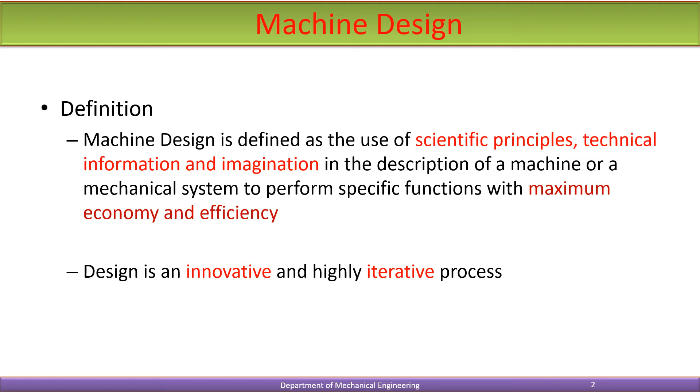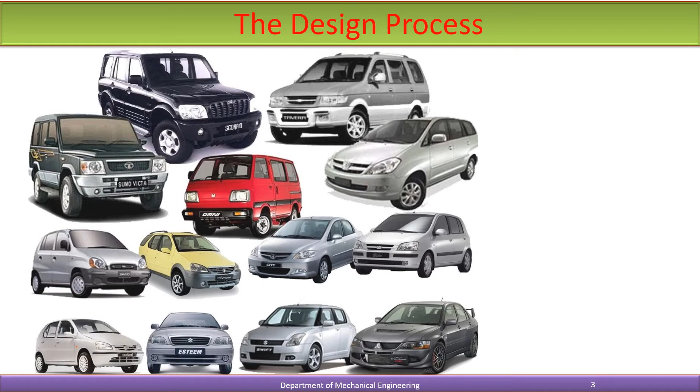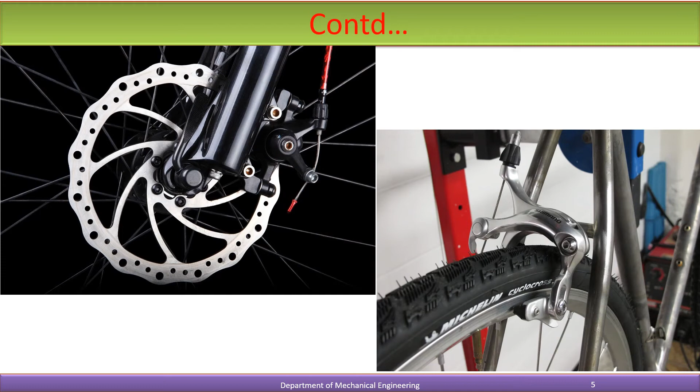The basic procedure of machine design consists of a step-by-step approach from given specifications about the functional requirements of a product to a complete description in the form of drawings of the final product. We need to follow a logical sequence of steps. First, we consider a market survey. Based on that, we specify the specifications of the product. Then we decide the mechanism. After careful study of the requirements, the designer prepares rough sketches of different possible mechanisms for the product.

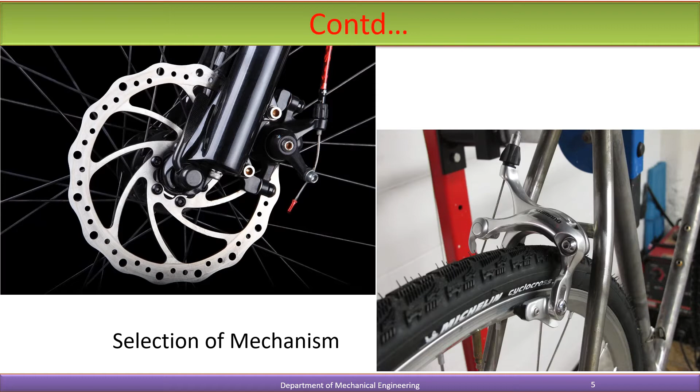For example, while designing a blanking or piercing press, the following mechanisms are possible: a mechanism involving the crank and connecting rod converting the rotary motion of the electric motor into the reciprocating motion of the punch; a mechanism involving nut and screw, which is a simple and cheap configuration but having poor efficiency; and a mechanism consisting of a hydraulic cylinder, piston, and valves, which is a costly configuration but highly efficient. The alternative mechanisms are compared with each other and also with the mechanisms of products available in the market. An approximate estimation of the cost of each alternative configuration is made and compared with existing products. This reveals the competitiveness of the product and you select the final configuration.

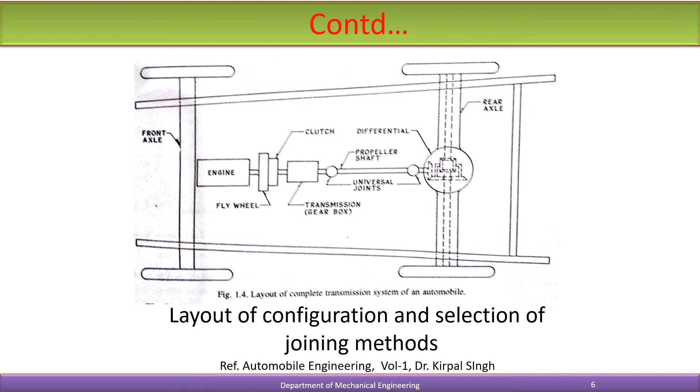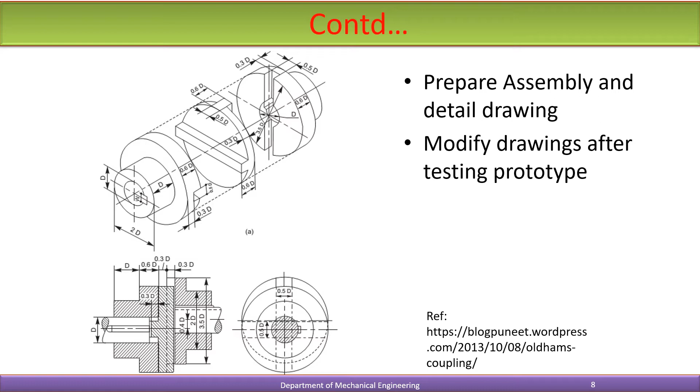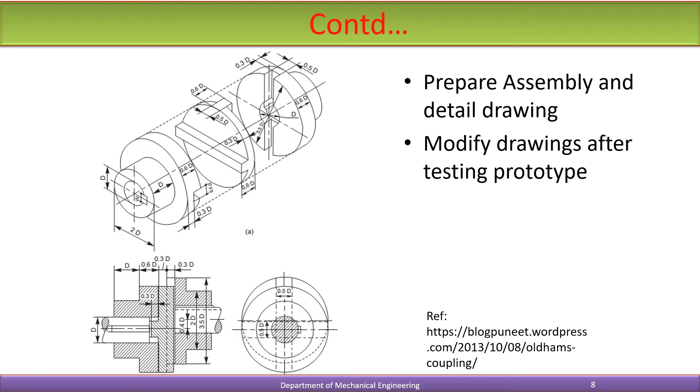After proper selection of mechanism, we prepare the general layout of configuration and select joining methods between the individual components of the product. Then we design the individual components. After that, we prepare the assembly and detailed drawings. Then we modify the drawings after testing the prototype. This is the complete designing procedure of machine design. We will be following these steps. These steps are interrelated and interdependent, each reflecting and affecting all other steps. These steps are very important when fabricating a new product.

Coming to the Kerala Technological University Design of Machine Elements syllabus: the first module discusses the fundamentals of designing procedures and materials and their properties; the second module discusses theories of failure and shock and impact loads; the third module discusses threaded joints and bolted joints; the fourth module discusses design of riveted joints, cotter and knuckle joints, and design of welded joints; the fifth module discusses springs and leaf springs; and the last module discusses shafting and designing of couplings.

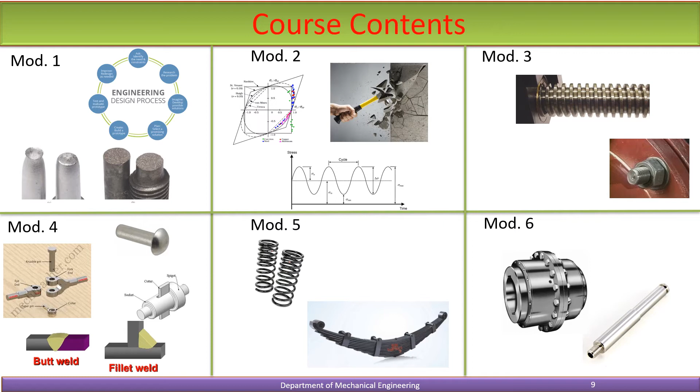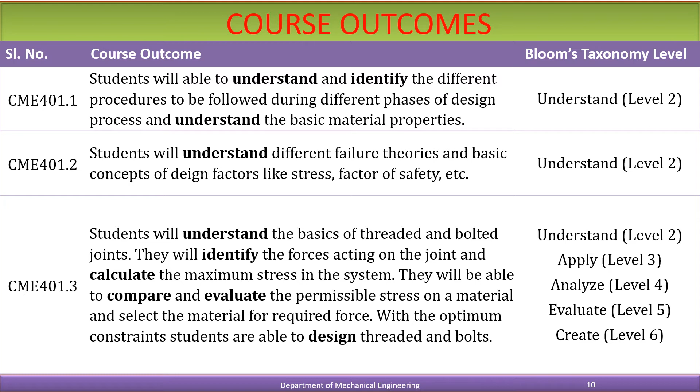The course objectives are to review the concepts of statics and strength of materials, to introduce the fundamental approach to failure prevention of components, and to provide knowledge in design of common machine elements such as fasteners, shafts, springs, cotter joints, and couplings. These are the course outcomes we expect after completion of this course, and you have to understand and identify some designing methods explained in this slide, which are self-explanatory.

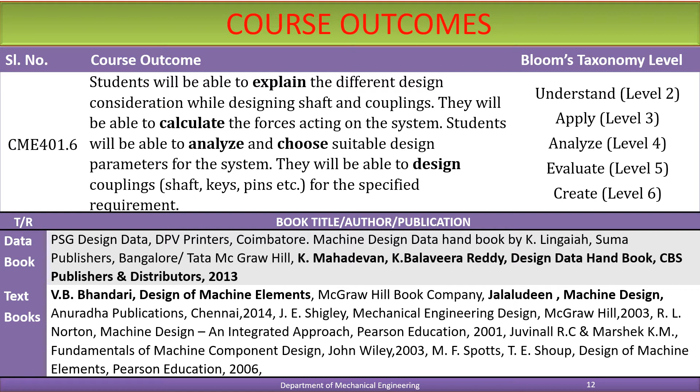The syllabus prescribes two data books: the Design Data Book by PSG, and by K. Mahadevan, published by CBS Publishers. In our video lectures, we will be following the data books by K. Mahadevan and K. Lingaiah, and the contents we use for our presentation will be from V.B. Bhandari's Design of Machine Elements textbook, published by McGraw-Hill.

A machine consists of machine elements. Each part of a machine which has motion with respect to some other part is called a machine element. It is important to note that each machine element may consist of several parts which are manufactured separately. For example, a rolling contact bearing is a machine element consisting of an inner race and outer race.

And rolling elements like balls. Machine elements can be classified into two groups: general purpose and special purpose. General purpose machine elements include shafts, couplings, clutches, bearings, springs, gears, and machine frames.

Special purpose machine elements include pistons, valves, or spindles. These are used only in certain types of applications.

The broad objective of designing a machine element is to ensure that it preserves its operating capacity during the stipulated service life, with minimum manufacturing and operating costs.

Just to consider some of the basic requirements: strength, rigidity, wear resistance, minimum dimensions and weight, manufacturability, safety, conformance to standards, reliability, maintainability, and minimum life cycle cost.

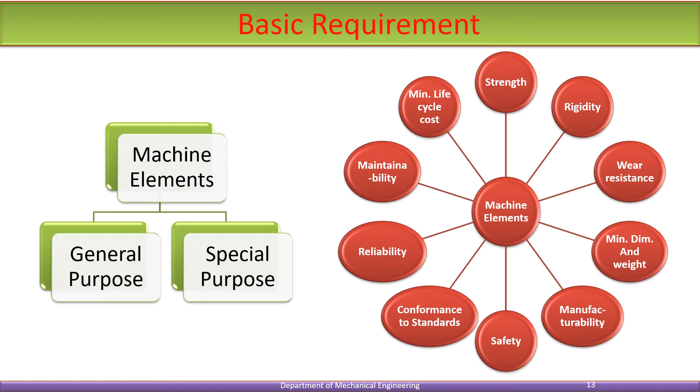These requirements serve as the basis for design projects in many cases.

There are mainly two types of designing practices. One is design by craft evolution. A bullock cart, rowing boat, pottery, and musical instruments are some of the products produced by the craft evolution process.

The salient features of age-old techniques are: the craftsmen do not prepare dimensioned drawings of their products. These products are developed by trial and error over many centuries.

The essential information of products such as materials, dimensions of parts, manufacturing methods, and assembly is transmitted from place to place and time to time by two ways.

First, the product, which basically remained unchanged, is the main source of information. The exact memory of the sequence of operations required to make the product is the second source of information.

There is no symbolic medium to record the design information of the product. These are mainly the weaknesses.

The craft evolution process successfully developed some complex structures, but the craft evolution method has become obsolete due to two reasons.

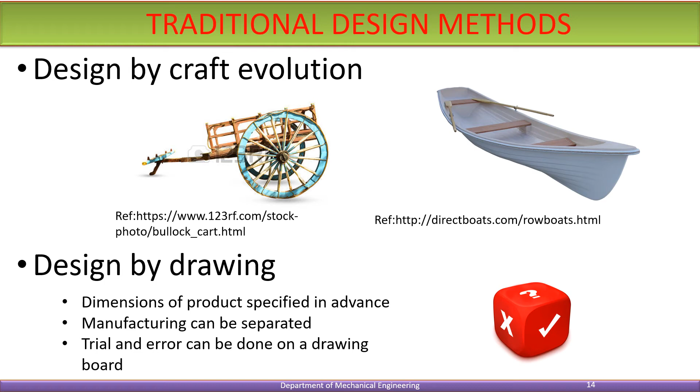The design procedure in design of machine elements are listed here. First, we need to specify functions. What do you mean by specification of function?

The design of machine elements begins with specification of functions. Consider the functions of machine elements like bearings: they are meant to support a rotating shaft and confine its motion.

If you want to transmit torque between the shaft and adjoining machine part, you need to design a key. To store and release energy, you need to design a spring.

And for measuring force, you need to design a spring balance. To hold two or more machine parts together, you have to design a fastening technique. This is what is meant by the specification of function.

Then we need to determine the forces acting on the body. In many cases, we draw the free body diagram of the forces acting on the body, both external and internal.

Forces acting on a machine element include external force due to energy, power, or torque transmitted by the part, static force due to its dead weight, force due to frictional resistance, inertia force, centrifugal force, force due to thermal gradient, or forces set up during manufacturing resulting in residual stresses, etc. All these need to be taken into consideration.

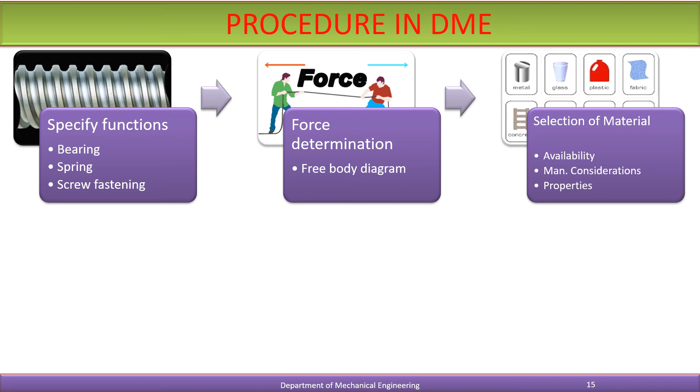Then we go with the failure criterion. A machine component is said to have failed when it is unable to perform its functions satisfactorily. The three basic types of failures are failure by elastic deflection, failure by general yielding, and failure by fracture.

Then we determine the dimensions. The shape of the machine element depends on two factors: the operating conditions and the shape of the adjoining machine elements. For example, an involute profile is used for gear teeth because it satisfies the fundamentals of gearing. A V-belt has a trapezoidal cross-section because it results in wedge action and increases the force of friction between the surfaces. So this factor is also important.

Then after selecting the parts, we modify the designs. The geometric dimensions of the machine elements are modified based on assembly and manufacturing considerations. For example, the transmission shaft is provided with steps and shoulders for proper mounting of gears and bearings. Revised calculations are carried out for operating capacity and margin of safety at critical cross sections, and we modify the design.

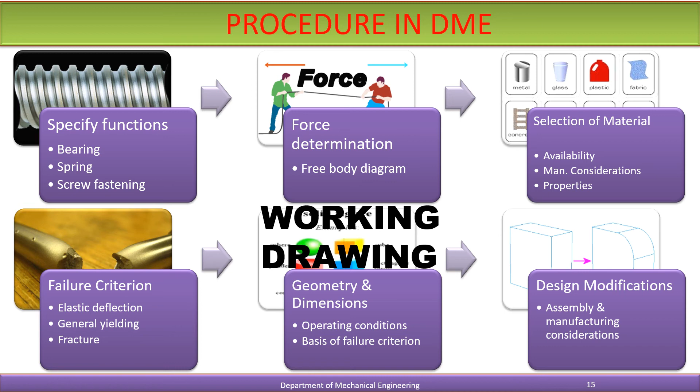Then it moves to the working drawing, the last step of machine element design. We prepare a working drawing showing the dimensions, tolerances, surface finish grades, geometric tolerances, and special production requirements like heat treatment, etc.

Design is defined as the process of creating or selecting configurations, materials, shapes, and dimensions for a product. This is a decision-making process with the main objective of optimization. There is a basic difference between design analysis and design synthesis. In design analysis, the designer assumes a particular mechanism, a particular material, and the mode of failure for the component, and with this information determines the dimensions of the product.

However, design synthesis does not permit such assumptions. Here the designer selects the optimum configuration from a number of alternative solutions, decides the material for the component from a number of alternative materials, and determines the optimum shape and dimensions of the component on the basis of mathematical analysis.

In design synthesis, the designer first fixes the objective, which can be minimum cost, minimum weight or volume, maximum reliability, or maximum life. The second step is mathematical formulation of these objectives and requirements. The final step is mathematical analysis for optimization and interpretation of the results.

Consider the case of design synthesis for designing a cylindrical can using the synthesis method. First, the requirements are that the cylindrical can is completely enclosed and the cost of the material should be minimum. The cans are to be stored on a shelf, and the dimensions of the shelf are such that the radius of the can should not exceed R max.